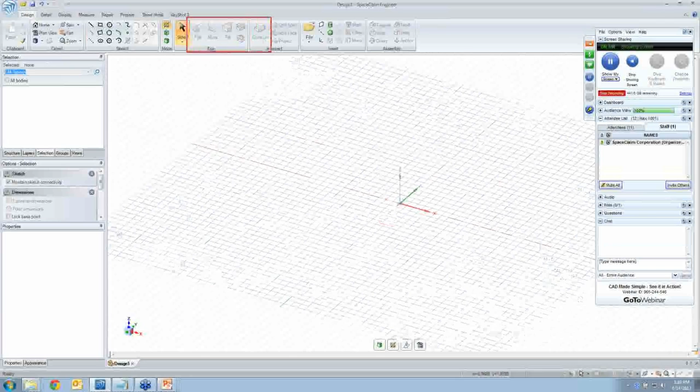So here's the SpaceClaim environment. I mentioned that we built this software around simplicity so anybody can use it. The way we've done that is through the user interface. I'm highlighting the four main tools you use in SpaceClaim to do the majority of your work. We've built everything around these. If you understand these tools, you generally understand SpaceClaim and how to get most of your workflows done. Anybody can understand these tools and their variations, so it is hands down an easy tool to use.

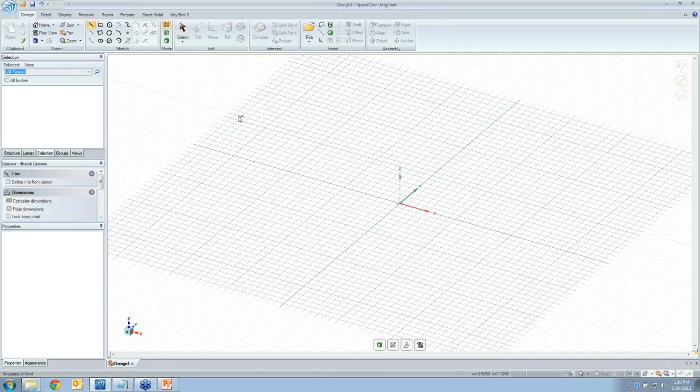Let me start off by talking about creating a model from the ground up. This is a common task people need to do—maybe you're sitting around a room and want to mock something up on screen, or send a model to someone, or you have a simplified representation of a model you want to run an analysis on.

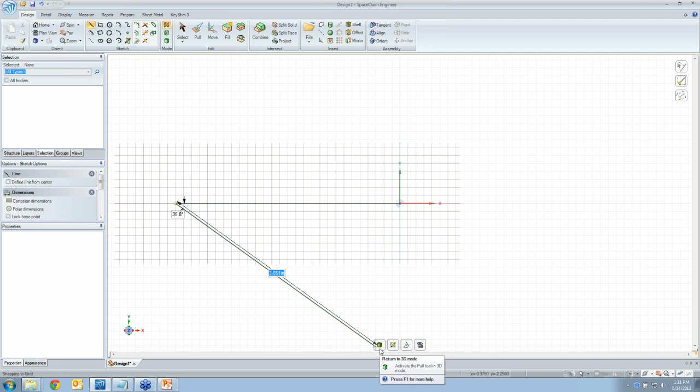We're not primarily a sketch-based tool, but I'm going to start with a sketch just to get going in the right direction, though I don't have to fully define it. I just have a line, that's it—a simple line. I don't care how long it is or where it is in space.

The first of my major tools is called Pull. This is your primary creation and editing tool. I take a line and pull it into a surface. From there I can transform the surface into a solid body. That's a fast way to get something on the screen.

Any face or faces that I pull on will offset, and this thing gets bigger and smaller. Now, I've been pulling on this thing left and right, up and down. I have no idea how big it is.

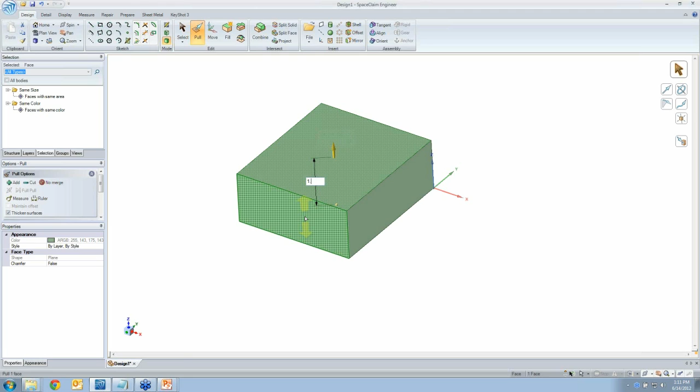But at any time I can get precision, put precision into the model wherever I want, just by putting something like a ruler dimension. So as I create the model—at the beginning, as I'm going along, or at the end—I can always dictate geometry and dimensions, and say this needs to be 1.5 inches thick.

Now this pull tool also works with edges. When I pull on an edge, the default behavior is to do something very common that people need: it puts a round on the model, or I click a button and turn it into a chamfer at any time. Ease of use—you pull on an edge, it does that.

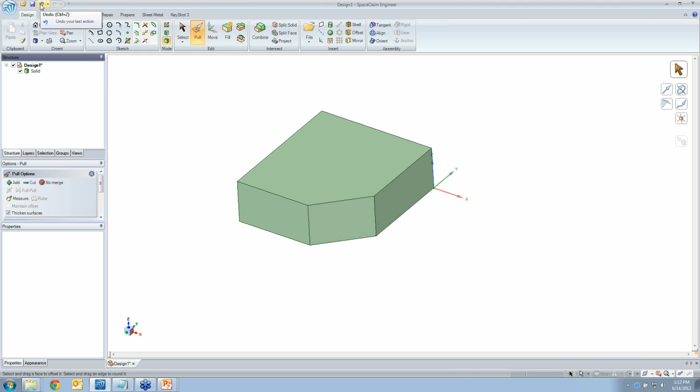Common tasks—you know, I want to get rid of that, I put it on the screen. I'm going to use a common Windows shortcut like undo just to get back to where I was with a box. Those Windows shortcuts—and you're going to hear me drill that home—work wonderfully in SpaceClaim, and I'll show a few more in just a second.

But I want to add some more things to this model. I don't have to mess around with sketches anymore if I don't want to—I've got data around me that I can utilize, like edges.

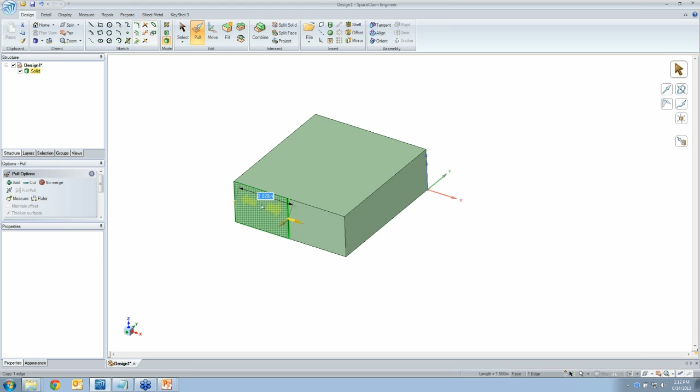SpaceClaim is now intuitive. When I have a new region to play with and I pull on it, it knows whether or not to add or remove material just based on how I interact with the geometry, which direction in which I pull.

I can add some more features like rounds to the mix to make this more aesthetically pleasing. But I want to add something else—I'm going to use those Windows shortcuts again and copy and paste a surface or a face, and I end up with a surface.

So there's my surface body I just copied and pasted. This is completely independent from the model, which means I could move it around with this second major tool, Move.

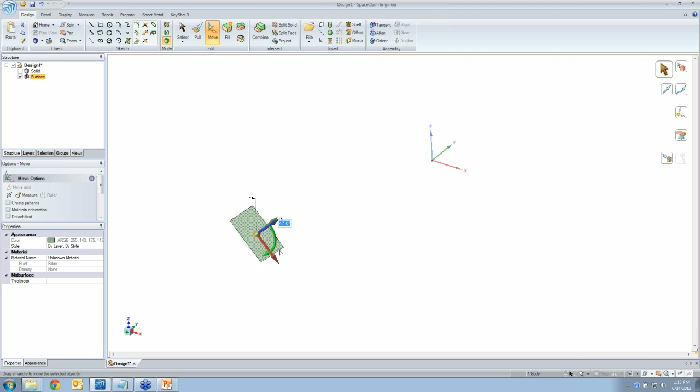This does translations in the 3 degrees of freedom or rotational freedom, so I can do anything I want. As I said, I want to add more features to the mix and modify this thing further.

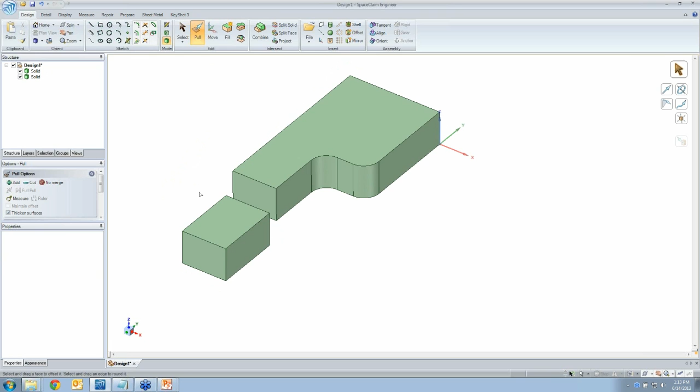I'll actually move it just a little bit over to the left and start to pull on this. So I have what we might call a multi-body environment—there's two solids here. But I might say it's time to join these two together.

I want to loft them together and have a nice smooth transition. Well, SpaceClaim—just by pulling between two faces—knows I'm trying to make a loft, and it automatically makes it for me. It guesses that's what I'm trying to do, makes the loft, and I can just solidify it from there.

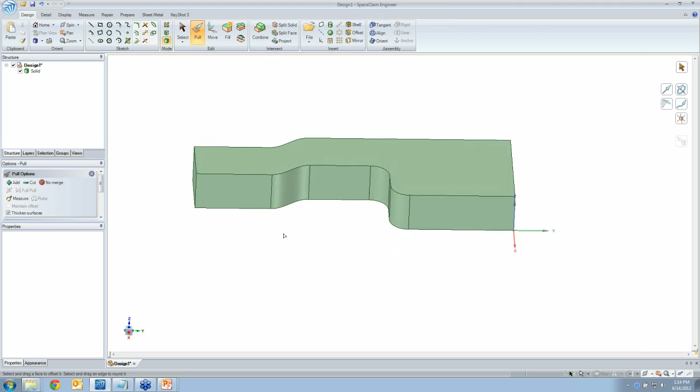Now, here's the kind of power you have in the way of editing a model in SpaceClaim, regardless of whether or not you created it in SpaceClaim. I'm going to say, let's just chop this thing up.

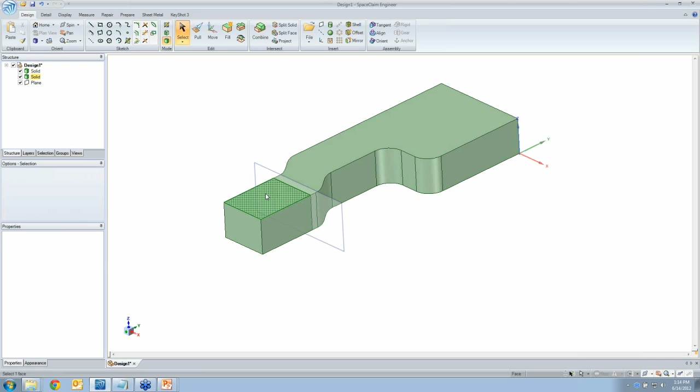The fourth major tool I have is called Combine. The name's a little misleading, but it stands for combination. It merges but also cuts bodies. I've said, let's cut that body right along that reference plane I inserted. So I've just sliced it in half and moved it apart, and I'm free to do anything I want.

Now, here's the power of the tool with a term I like to use called 3D plagiarizing. I'm going to open up a brand new file, called Plate. Let's just open it up in SpaceClaim.

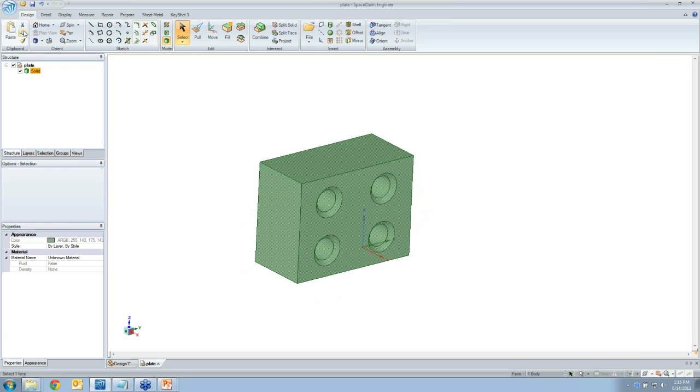It consists of just a plate with a couple of holes in it. I really like this design, or aspects of it, and I want to sort of merge it into the other one. So I can do that with SpaceClaim. I don't have to jump through hoops. The way I'm going to do it is the Windows shortcuts, copy and paste. You guys probably all use something like Microsoft Word, and you copy and paste things all the time. So I'll just paste this thing into the document.

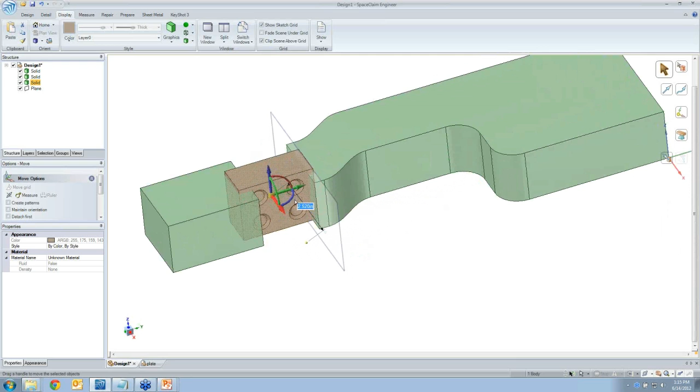Now let me change the color so it's a little easier to see things. Change it to orange, and from here, use my move tool and shift that thing into the position that I want. Now you'll have to extrapolate a little bit. This thing isn't exactly the right size, and it's not in the right location.

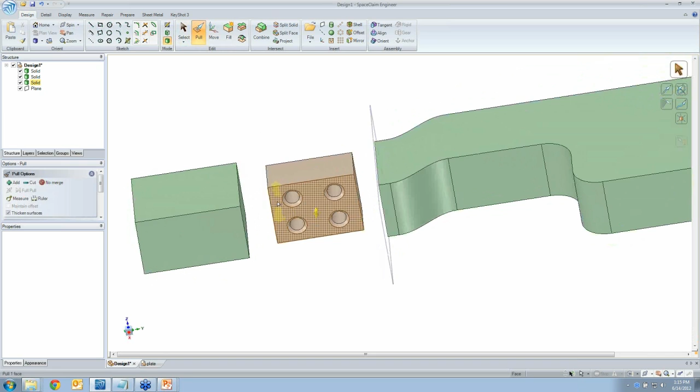But you can imagine if I've got a couple of designs and I need to somehow join them together, I'm free to do that with this tool. Think of this as like Play-Doh on the screen. It's just geometry to us, so we let you modify things however you want. Say I want to join those two together, make a nice smooth transition. I use the pull tool and blend right between them.

So there's two bodies on the screen. When I do the last merge, I'm back to one body. This part is drastically different from what I started with, right? And I've used only 3 tools to do it: pull, move, and combine. I haven't even shown you fill yet, but I'll show you that in a moment. So the point of this one was to just give you a flavor, an idea of the different things that you can do in SpaceClaim and introduce you to the workflows.

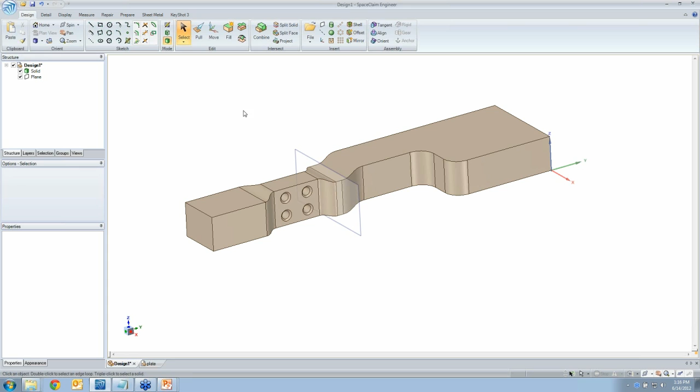Now let me transition to another model, and we'll talk more about editing files. This is an ACIS file I'm going to bring in. That's a neutral file format. It's actually the kernel that SpaceClaim runs on. But let me show you the different file types that SpaceClaim will open.

I'm zooming in right now so you can see them all. Basically all the major players of CAD, they're up here. You can open up these files, all these files in SpaceClaim, and edit them as if you created them originally in SpaceClaim. You have that kind of flexibility and that power.

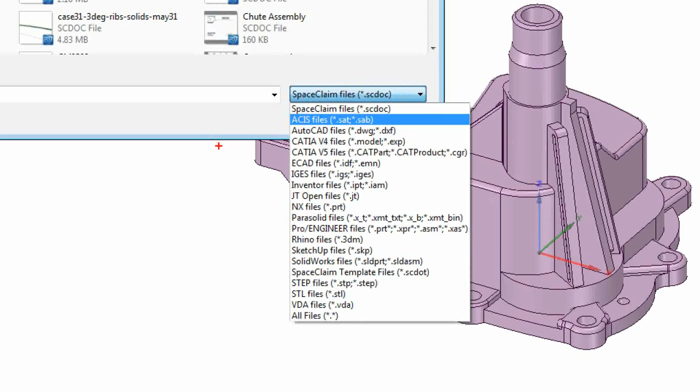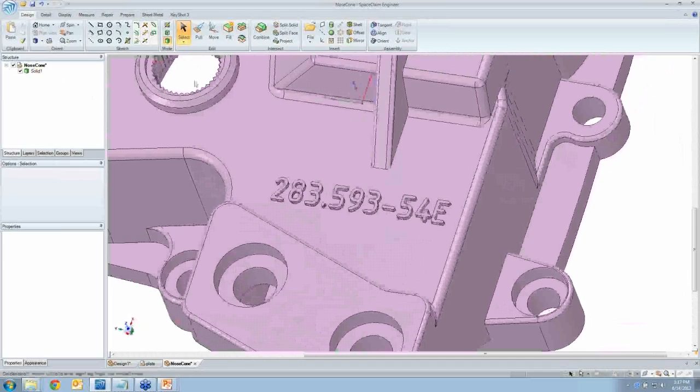Now here's a model, and whatever you're trying to do, if you need to modify this for analysis, or if you just need to simplify it and make changes, you can do it in SpaceClaim. Let me show you how. There is no history tree if you're used to a feature-based CAD system. I don't have any features and sketches to go edit. So that's a problem, right?

Not in this tool, because I have this third major tool called fill. If my pull tool creates geometry, my fill tool is what gets rid of it. I select things I don't want and just fill it in. It's sort of that magic eraser button.

So I have a hole over here with all the teeth, the internal teeth. If I grab that entire thing and say fill, it just goes away. I delete all that at once.

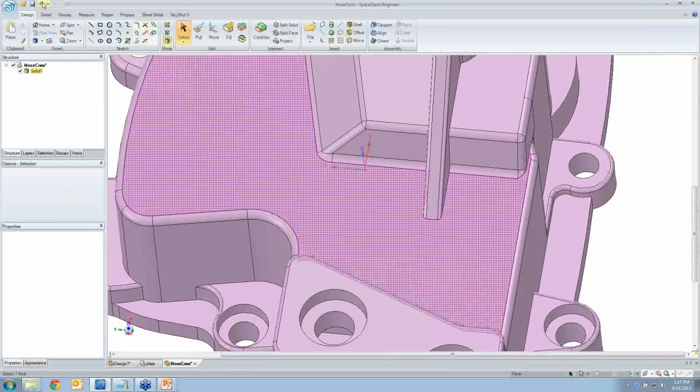I'm going to undo. Because maybe I don't want the teeth, but I do want the hole to be present. There's half a dozen ways to get rid of that hole. I could fill in the teeth, or I could say, let's just pull on that top face and pull on it till it's infinitely small or 0, and I'm left with a diameter with which I can pull on.

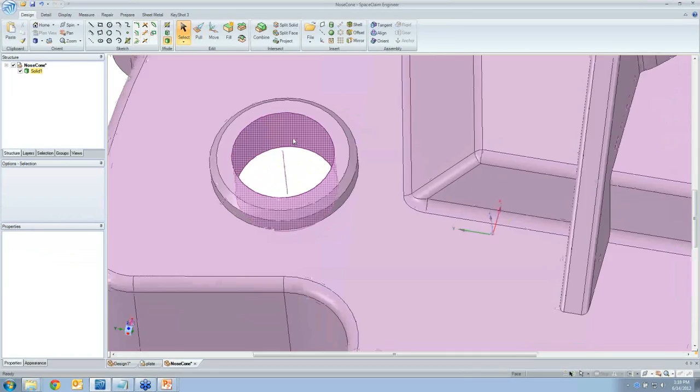I don't know who created this file, or why, when, where, or their design intent. But it doesn't matter, because it's just 3D data to us, and we let you edit it.

Take rounds, for example. I know for a fact that analysts working with a model don't want rounds because they add to the complexity and degrees of freedom, much like raised text that I got rid of originally. So I use the fill tool, fill it in, and I get a sharp corner.

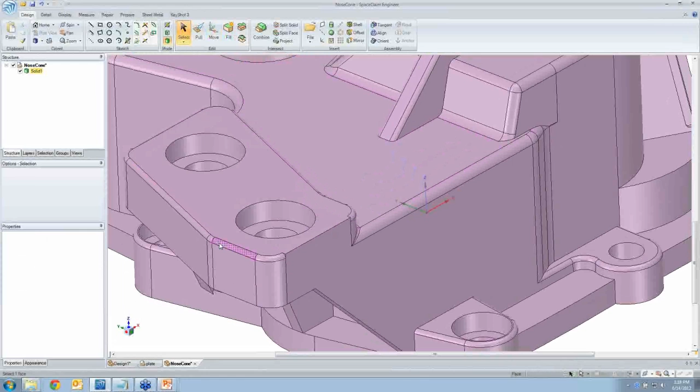That's great in and of itself, but I have a lot of other rounds I may want to get rid of. I could grab a chain at any time by double-clicking and fill those in, but there are still a lot more rounds in this model. Do I want to go through all of them individually and grab them? No, that's kind of a pain. So I needed a unique way to select them.

We have a tool called Power Select, which looks for similar geometry in the model. In this case, I can tell SpaceClaim to grab every round in the model equal to or smaller than the one I just selected. There are different ways to search, but that's just a common one. Down at the bottom of the screen, it tells me I've got 82 faces selected, meaning 82 rounds selected, and that's all it does is a selection tool.

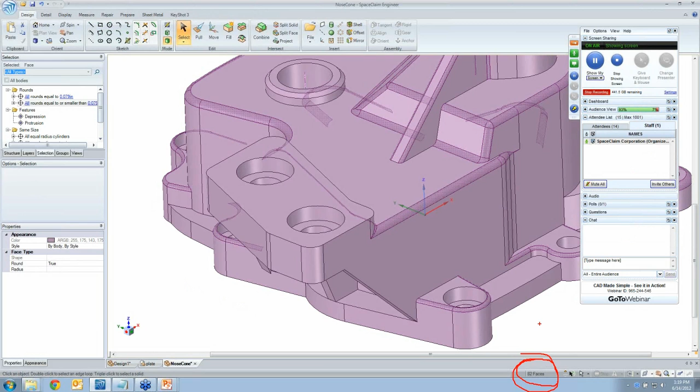But between that and the fill tool, I can wipe all those rounds out at once and drastically change what this model looks like. And I can keep going from there.

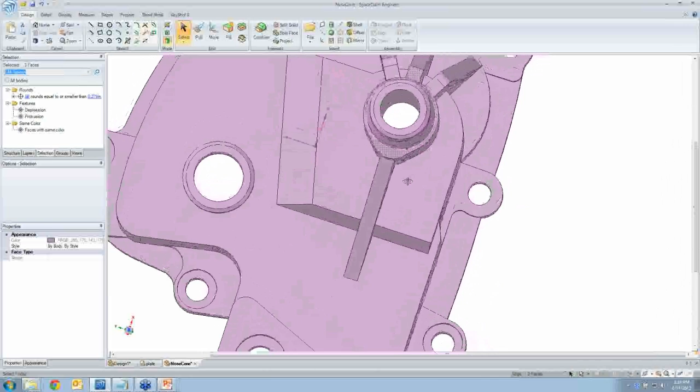There's what looks like a cam profile on this rounded cylinder. Maybe I don't want that, so I take some faces and fill it in. I don't know how it was created, but it doesn't matter to me because I can get rid of it. So say I want to simplify this further.

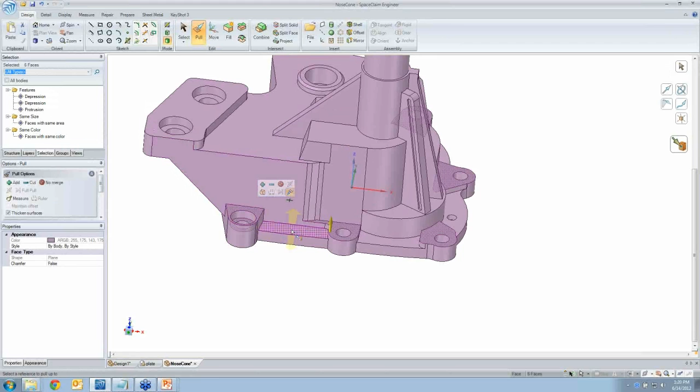There's a lot of these standoffs that go all the way around the model, and I want to get rid of them. I could use that Power Select tool and get everything coincident to that face - another way to look for similar geometry. Grab another face, add as many to the mix as I want, and just pull on them until they're gone, or until they go up to another surface and are essentially consumed.

One of the first things I showed you was dimensional control, and I could certainly control the height of things with a dimension. That looks like it's almost a quarter of an inch. I'll make it 150 thousandths, or whatever value I want. But guess what - when I make it 0, they just go away. Those standoffs just disappear, as if they were never there.

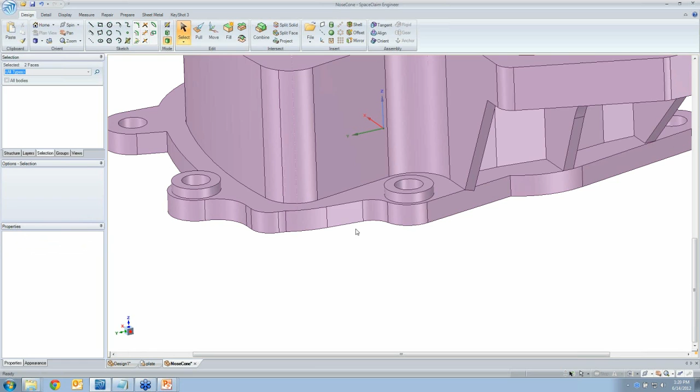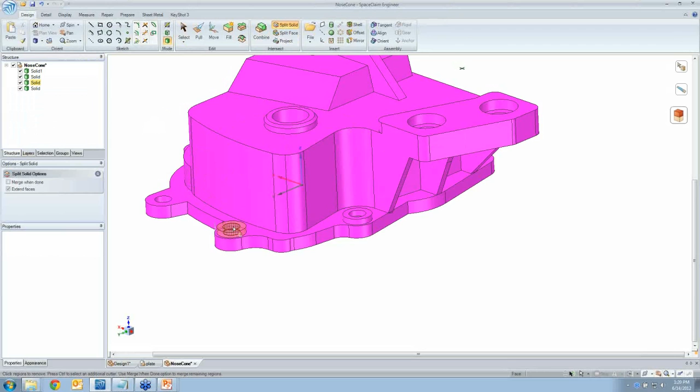Now, this is actually my favorite tool in the software because of what it lets you do in just two button clicks. I click one face, and it's the split solid tool. It slices up the model along that face, divides it into multiple bodies, and puts me in a mode of deleting those extra bodies. So I had 4 bodies, now I'm down to 3, down to 2, and I keep clicking away, getting rid of bodies as I go.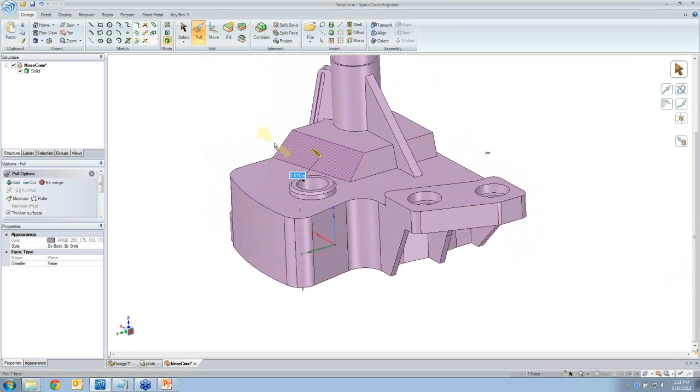This model looks a heck of a lot different than it did when I started, because I'm able to defeature and simplify things so easily. But if I need to add things to the model or modify it in any way, SpaceClaim lets me do that. This entire standoff, this entire bracket - I don't know what you'd call it - on the right side, two button clicks, split solid, and I've broken that up and can delete the whole thing. That's the kind of power you have.

There are more things I can do in the model, but the primary purpose of this was to show you some of the editing and defeaturing capabilities.

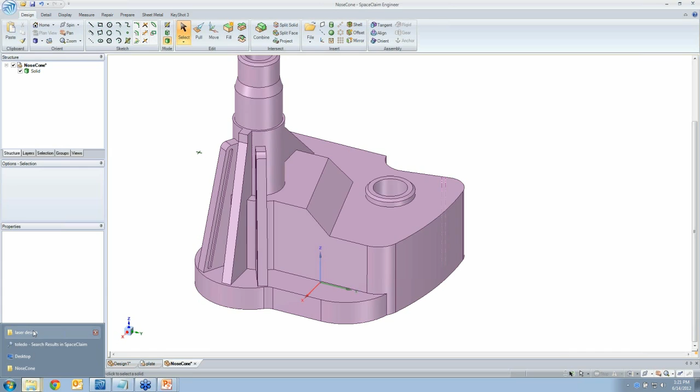All right, so let me go on to another one. This is a fun one to show. Some of you might be around the automotive industry, so you're just used to automotive-like parts. Let's see, frame member, here we go. I've already converted this to a SpaceClaim document ahead of time, but it came to me as something else.

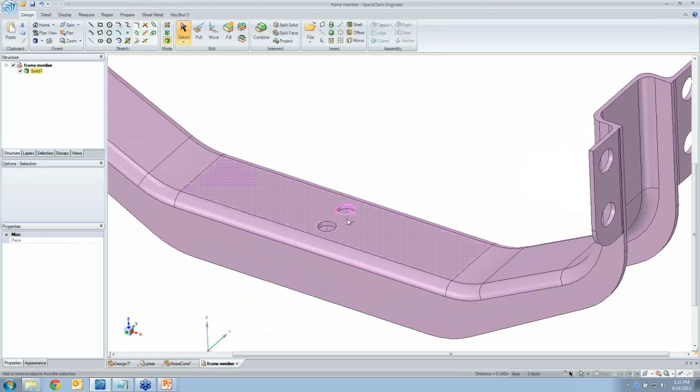Let's say this file is just some kind of primitive frame. You receive this nice clean model and you want to propose some changes to someone else. There's a design requirement and some sort of interference, and you need to make a new concept. You just need to edit this thing, and you don't want to jump through hoops in how you do it. Use the tools in SpaceClaim to quickly and easily edit a model.

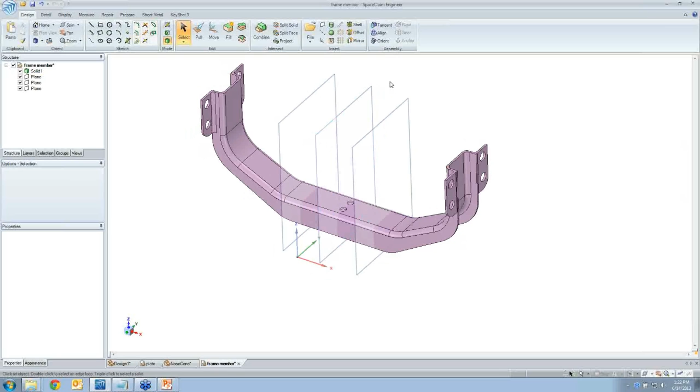So all I'm doing right now is making a couple of planes and spreading them apart, and I'm going to use these planes as a basis for how I want to slice up this model. So I use this combine tool and say I want to slice it up along these planes, and now this model consists of 3 bodies.

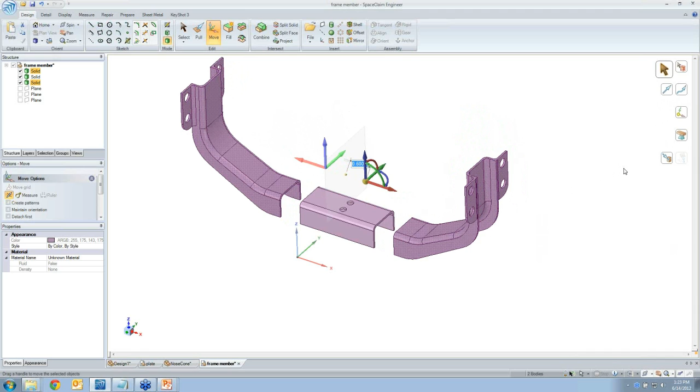So what are the things I can do with this? Well, in order to get rid of this interference, I might need to take the 2 ends that are highlighted right now and shift them apart. I could move those in a symmetric fashion, so it just saves me a step. I can put precision in and say let's go exactly 0.35 inches, and move them slightly this way, and that'll take care of the interference and where things now need to be situated.

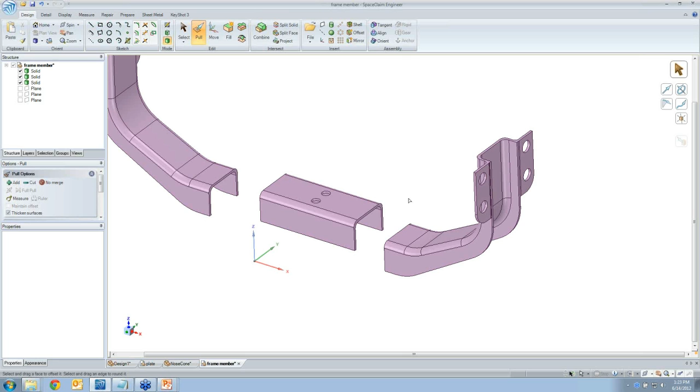But I've got 3 solids. I need to join them together. So just as before, I could elect to pull between them and get a brand new solid, a brand new lofted section. SpaceClaim does it automatically for me, knows what I'm trying to do. This is basically a brand new model, but let's make some more changes to it.

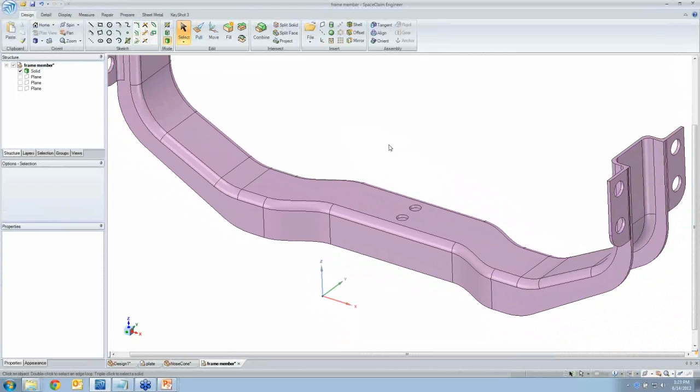These holes - maybe I want to copy this hole and have it traverse along, have it go along this edge. I hold down the control key as I'm making a movement, and it makes a copy. I mean, that's a Windows shortcut, everybody gets that and knows that. But I can actually copy it along this edge and have it go up this face, and so I know it's the same distance from that edge wherever I go.

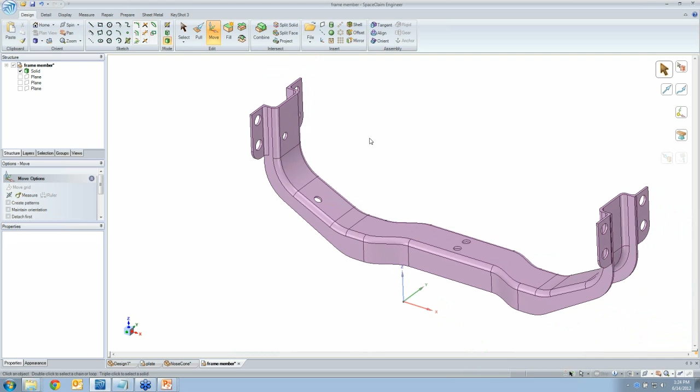Oops, I'm going to undo that, it jumped on me a little bit. Let's put one right there. There we go, so I've got a couple new holes. And obviously this isn't detailed, maybe this looks a little goofy how I have the holes, but I think you get the idea on the capabilities and the power you have for editing this model.

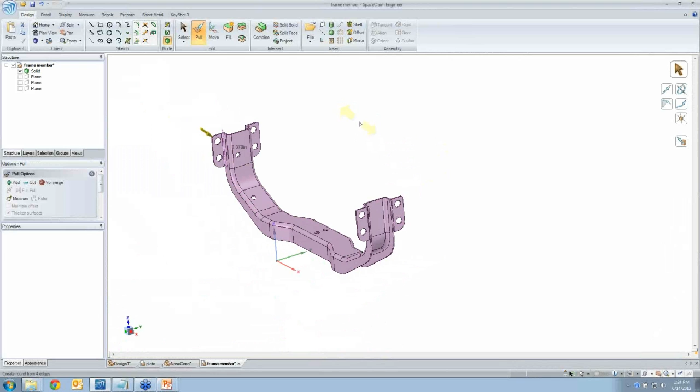If I want to throw some rounds on the top to smooth this thing out, because somebody just plain old didn't do it right, or the intent isn't the way you want it, I could do that and pop some rounds in. You see all the 8 holes that are on the brackets on the side or on the top right by the ears I just put in?

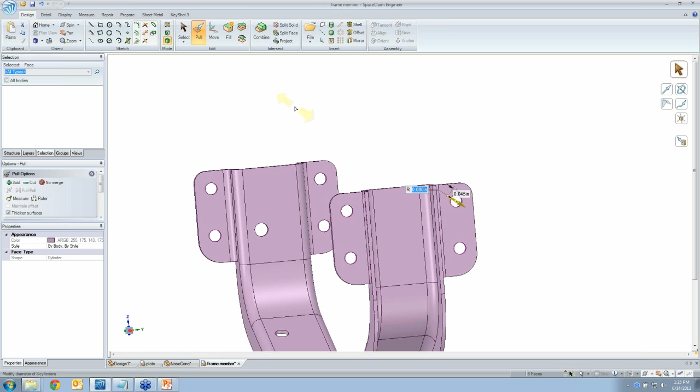Maybe I want to change those, modify them. I don't want to select all 8 holes - either there's too many of them or I'm lazy. So I'll use that power select tool and grab every hole that's the same size and then go make a modification to it. Pull on them, make them bigger or smaller. I could move them around. I could get rid of them if I wanted to. In fact, let's go get rid of one of those holes for now, just so there is something that's definitely gone from the original.

I'll fill it in. Okay, so I've made a bunch of changes. This is my new concept. I say, hey, I want to run this by someone and see what they think. How do you do that? How do you do that in a 3D fashion?

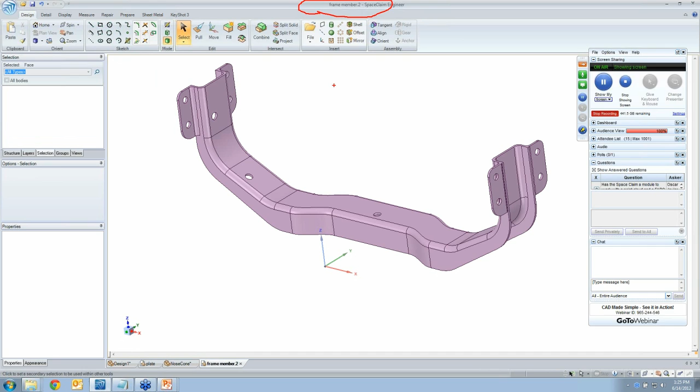Well, what I would first do is save this off as a new version, so it's related to the original. It's called framemember.2. Okay, so you got 2 files, framemember and framemember.2. As far as comparing the two, we give you a tool called 3D Markup, and it lets you compare things in a familiar, easy to understand 3D fashion.

Now let me go find where that original file is called framemember and insert that into the mix. Okay, so I got 2 files on top of each other. The original is somewhat transparent, and the new one in the lower left is the one that's colored.

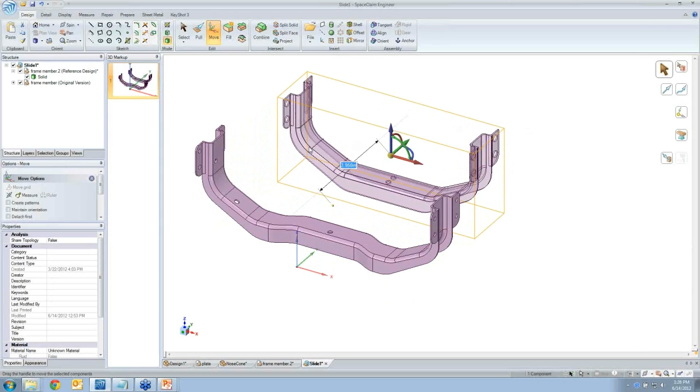How do you show changes? Well, dimensions are really the best way to show changes between things. So I could put some dimensions in and show, in this case, maybe what the overall dimension is. It tells me it's about 9 1/4, and it was 7.3.

So I get is/was dimensions, and I could put those anywhere in the model that I want. Putting in a new annotation plane, I could tell what the distance of this offset is. It was 0, obviously, there was no offset. Now it's exactly 0.35 inches, 350 thousandths.

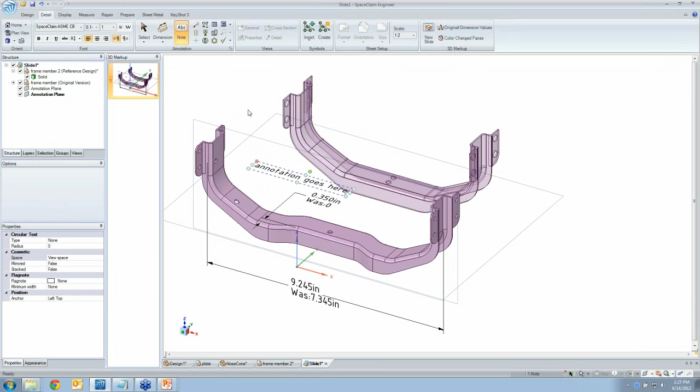All right, sometimes dimensions don't always cut it, and you might need an annotation. I'm not sure what to type, what's relevant, so I'll just say annotation goes here, and I can point that. Anything I want, any sort of text you need to show or put in there to convey what's changed, you can do that. However, is it always apparent everything that's changed through dimensions or annotations?

Maybe, but pictures are worth 1,000 words. What we let you do is click a button and show all the changes in color. So every color on the screen means something unique.

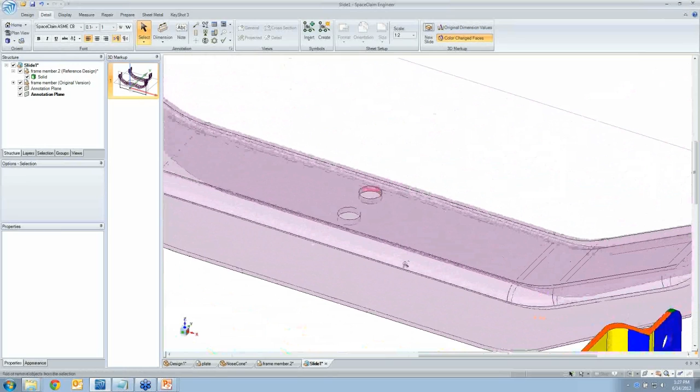A green is a brand new face. You'll see on the old model, there's something that's red, that hole. That tells you it's gone from one iteration to the next. Yellow is just a location change. Blue means something has changed along the face in one way or another. So they all mean something and tell you intelligently what's happened.

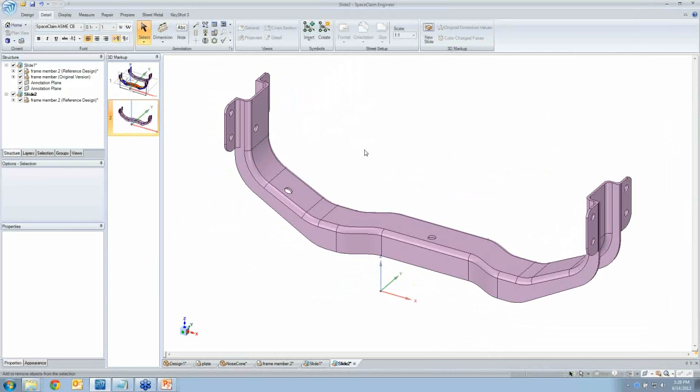So what you're looking at on the screen is a slide right now. And here's that slide. I could always add a new slide to the mix and show 2, 3, 4, as many iterations as I want and have as many slides as I want, as many different viewports to show what's actually happened on this model.

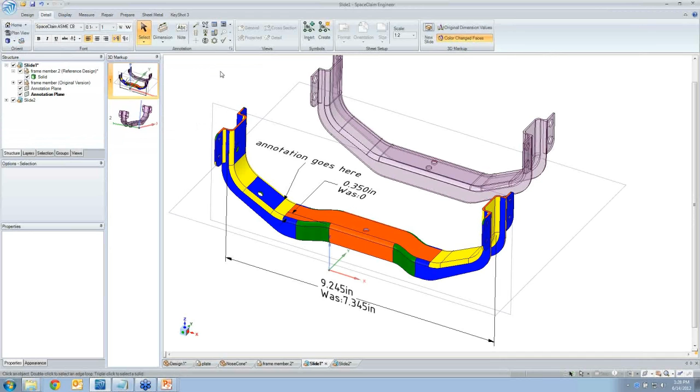And what do you do with slides? Well, you save them out as a PowerPoint document. So what you see on the screen right there in SpaceClaim gets saved out to a PowerPoint tool. So this is called 3D Markup. Great tool for communicating in 3D, whether within your company or outside, conveying all the changes in an easy-to-understand 3D fashion. Okay, so that's the next example I wanted to show you.

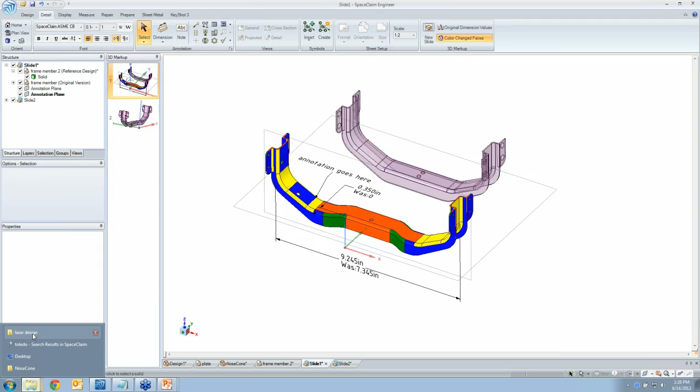Let's see what's next. There's a couple different directions I could go in. I'll show you one more model and give you a feel for how we might handle something like a plastic injection molded part.

This is going to be a step file I bring in. I think it's called Base Design. That's great, you can just drag and drop files right into SpaceClaim and they open up. They open up right there.

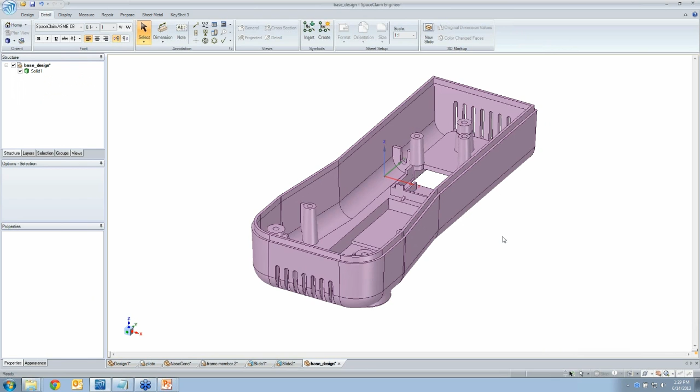Step file, again, I can't stress the importance of it. I don't know how this model was created. This is just dumb 3D geometry to me, but I can go in and start making modifications anywhere I want, add some rounds to this.

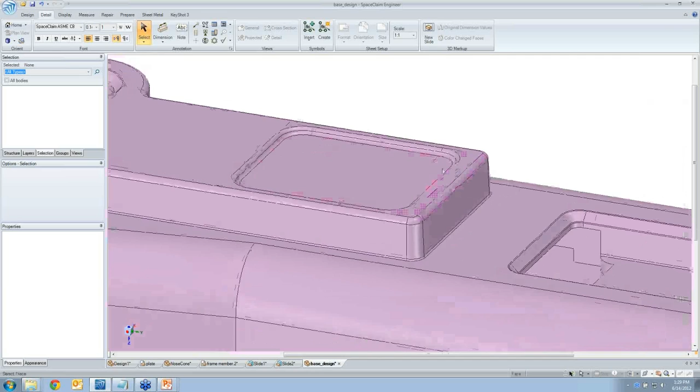Maybe the point is I need to make this thing more manufacturable. Someone gave me a model that's close to being manufacturable, but it's just got to have changes on it so that there's the proper draft everywhere. Again, anything I need to modify in here, I can accomplish. If I need to change the actual distance of this opening, right?

I go move some faces around. Now, I accidentally selected something wrong, but I could move this thing up and down. I probably need to get the face below it if I'm worried about the thickness of it, and sometimes I can't. So right there, I wasn't able to make a change.

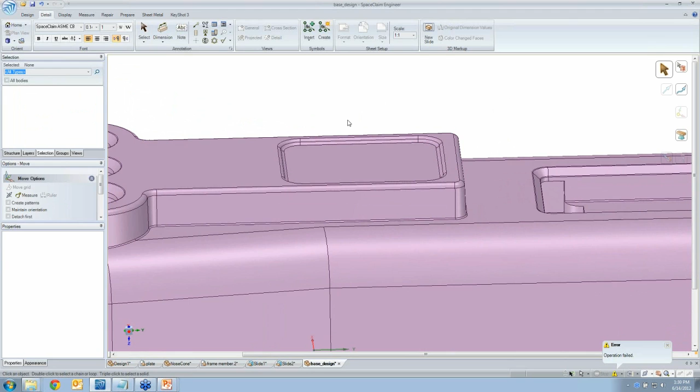You know what I would just do though is probably fill in those faces and just get rid of them. I'll just undo it for a second and show I could move that thing up or down and change the depth of it. In fact, I might just try to move it right now while those rounds aren't there.

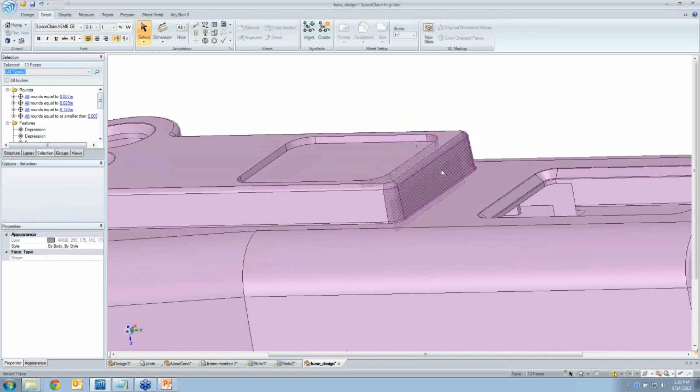I mean, rounds can be problematic anywhere. They're complicated, but we give you the tools to either undo what you've done or fill them in. There we go, and then go make those changes. So now I could just reinsert those rounds, or actually add draft to that face, to those vertical walls.

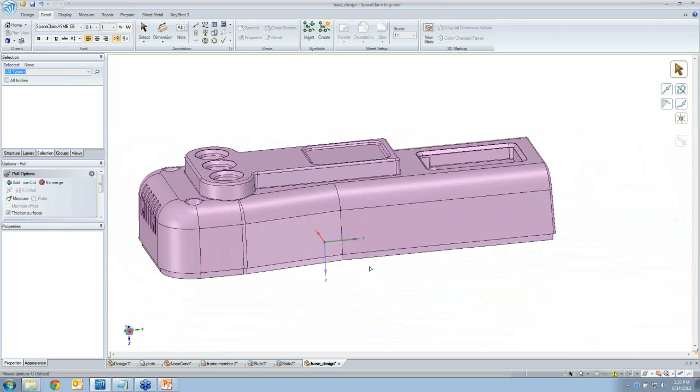And I'll show you how to handle draft on the inside of this model. There's a ton of things I could do on this model, but I'm going to try to just keep it short and simple.

How do you know if you need draft on something? How do you know if something is moldable? Well, we have a tool for that, it's called draft analysis, and it will show you what your draft actually looks like.

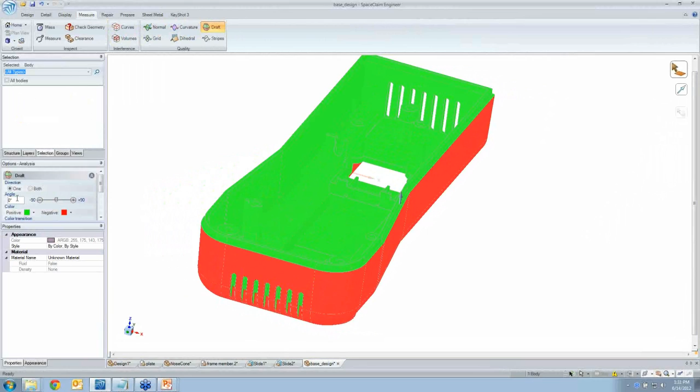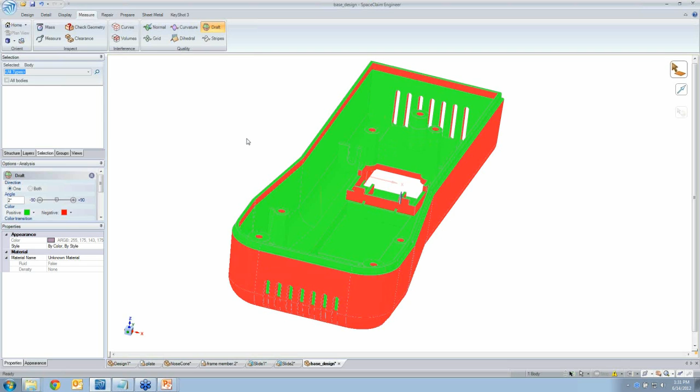Now I have it set to 0 degrees, so that's not relevant. If I change the angle to 2, then every face that shows up in red does not have adequate draft, it doesn't meet that 2-degree requirement. You can see the perimeter, that ring around here that's red. So I need to take care of that, and a bunch of things on the inside as well towards the center. Let's take care of both of those, and then I'll wrap things up.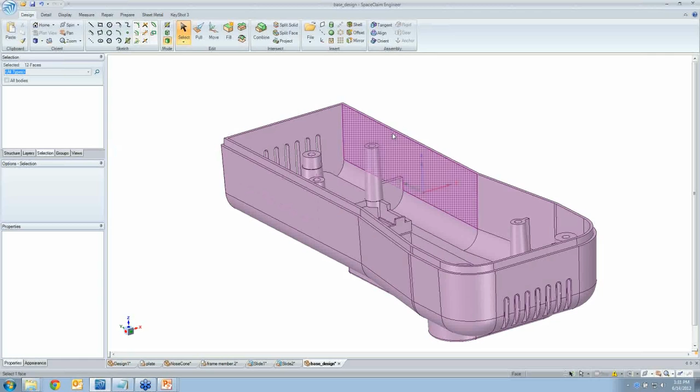This perimeter ring doesn't have draft, so there's a lot of ways to remedy that, but I think the easiest way would be to get rid of those faces and let the vertical walls extend up. So I just fill in the faces. What's happened is that the vertical walls have just extended all the way up, and there's adequate draft everywhere.

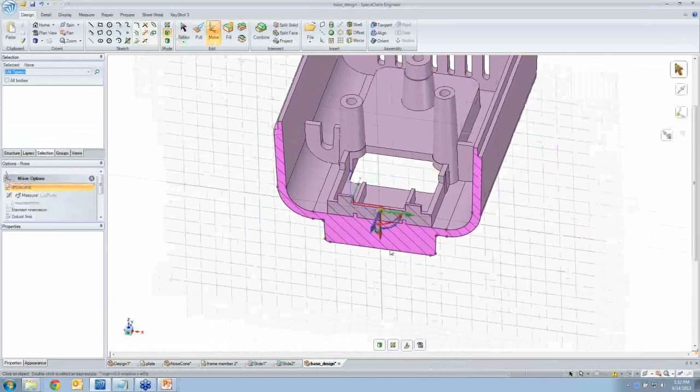Now, something I'm not sure I've shown you yet, but this is extremely relevant to modifying models: we let you slice a model in half and visualize it in a familiar cross-section mode. It's not just good for visualization, you can actually fully edit a model in cross-section mode. Pull, move, fill, and combine, those 4 main tools and everything else I've shown you, you can utilize in a cross-section mode. So how would I do that?

I've got things like draft that I need on those 8 vertical walls. You handle things like draft with the pull tool. I grab faces I want to draft with this and select a draft plane, and it tells me right there what the draft angle is.

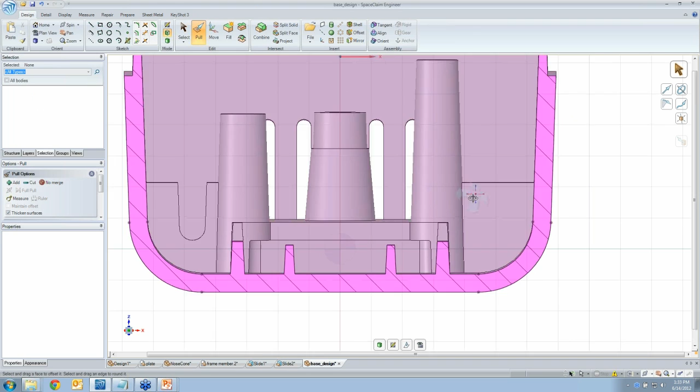Notice I don't have a special draft tool, I just use pull to do most of my creation and editing functions. Now I could keep going from here and touch every face that may need draft and modify it, but hopefully you've seen by all the examples I'm doing how SpaceClaim is an enabling tool that lets you take in any 3D data and modify it how you need to.

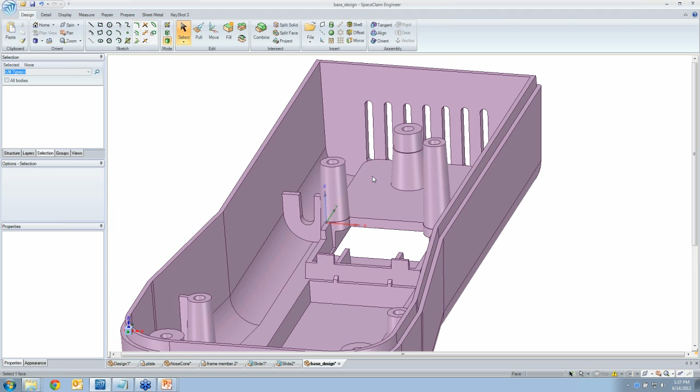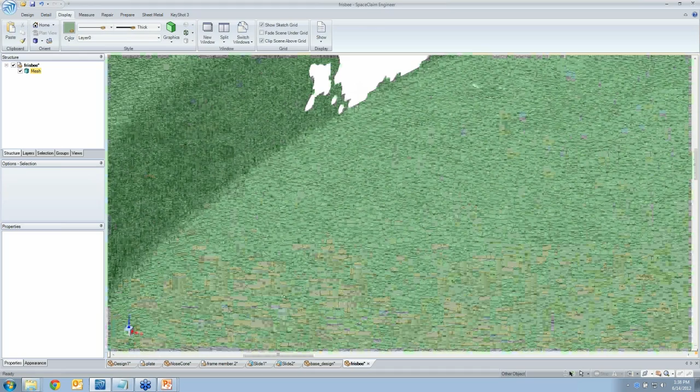Okay, as I said before, STL files are just faceted data. They're not solid, so you have to use some kind of tools to recreate the geometry for you. Let me get that on the screen. All right, so here's an STL file that I brought in. It comes in and it says mesh, so it's not solid data. You can tell right away. If I show all the facets of the mesh, you can see just how complicated this thing really is. So the scan did not come in very clean, and this could be the result of any sort of scan, just bad data. So we let you actually recreate this.

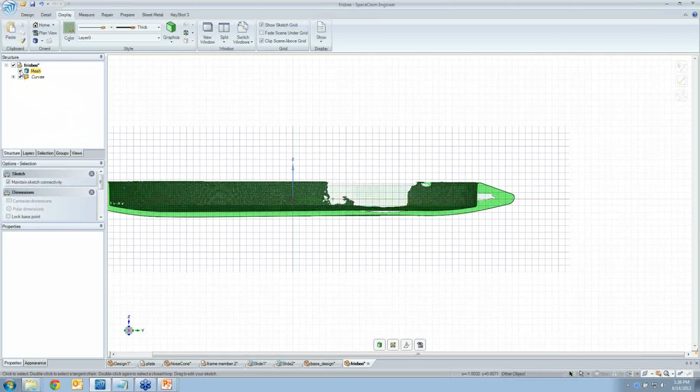Now there's a bunch of things I could show you. I'll just keep it simple for now. How do you do it? Well, the trick is two things. When you take a cross-section of an STL, we will find out where the cross-section intersects the facets, and we'll actually let you fit a curve around it. We will draw a series of splines and arcs and lines that closely fit where the facets intersect.

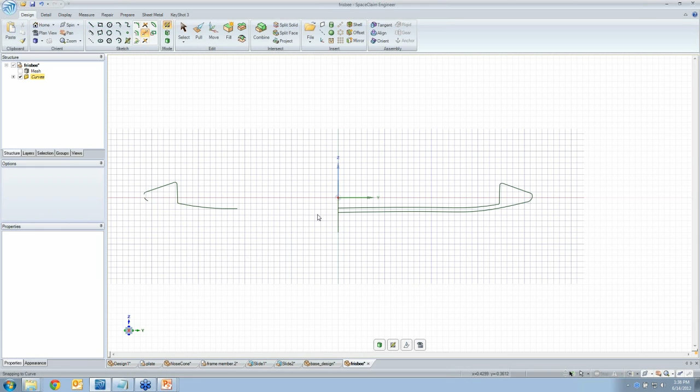Now, for me to recreate this, I really only need one half of it. I'm going to skip out on the left-hand side, right? That's not relevant for me because it's not complete, so I'll use just the right-hand side instead. So I just use a couple simple sketch tools to be able to get this in a useful state and get rid of everything on that one half. Now I have a closed loop set of sketches, or sketch entities, vectors, that turns into a surface.

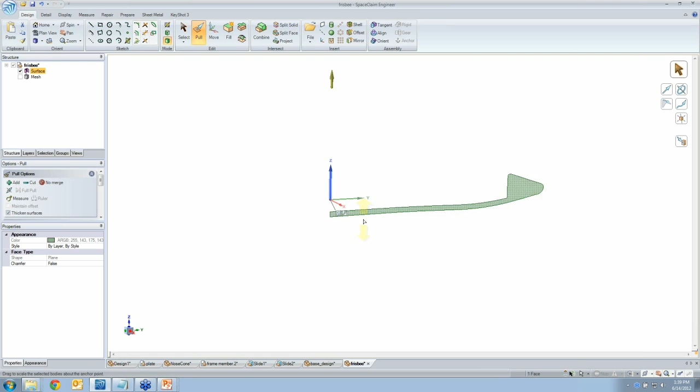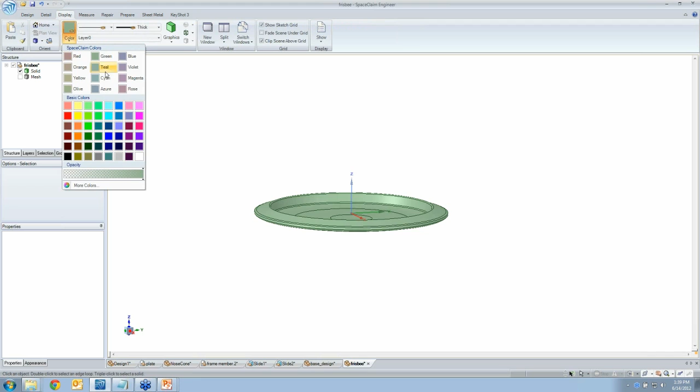How do I recreate this thing? I use the pull tool and say I want to revolve it around an axis. Let me just zoom out for you and make a full revolution. And I've got that part recreated. There are some complex surfaces on this, but regardless if they're prismatic or complex, we will still create those. So if I change the color, you ought to be able to see the real part and the mesh side by side. Let's change that to - there we go. So you can see how closely they fit.

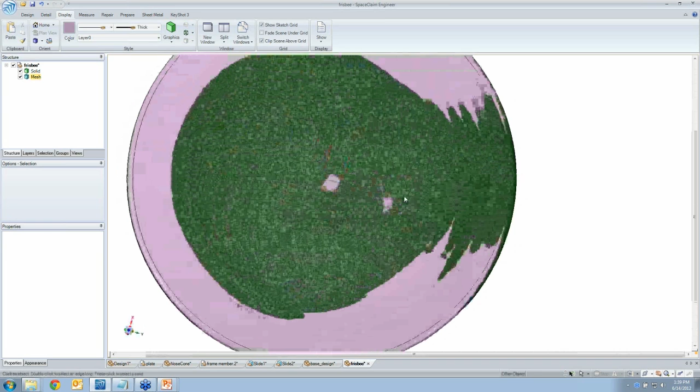I mean, it's basically right on. But it's only going to be as good as your scan data is. And I can get more and more precise if I use more cross-sections, whatever the case may be. It's just a function of how much effort you want to put into it, but we can recreate that data.